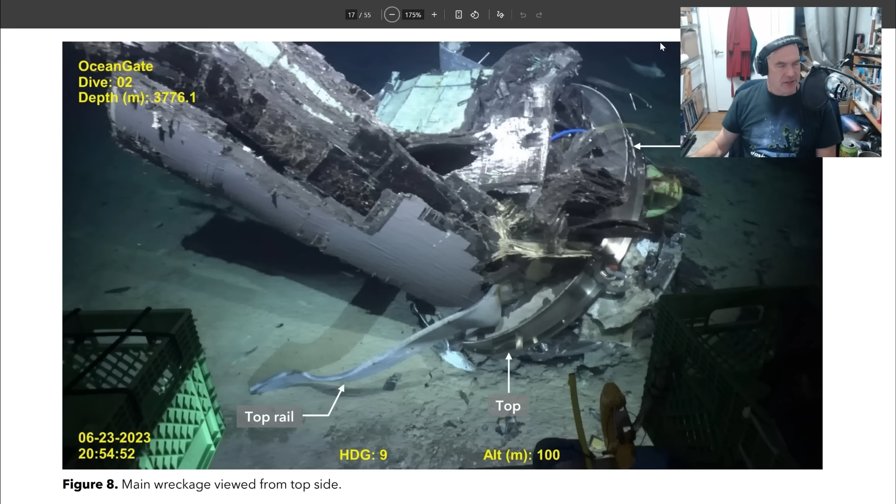So yeah, this is like the remains of the wreck. Well, first of all, the thing I want to talk about is the NTSB. They finally have released their report. So the National Transportation Safety Board, I read a lot of NTSB reports because they're usually the people involved in investigating plane crashes, right? Because it's transportation.

They're also involved in things like highway crashes, marine accidents, railroad, and under here there's also pipelines because, you know, if you've got a pipeline moving gas or oil between states and it fails, that's technically a transportation issue. So yeah, they've released their full docket with all the supporting documentation.

But before I look at this, I want to flick over to the Coast Guard site. Now, they also published their final investigation, their Marine Board of Investigation report in August. But the one that I want to look at here, just for a moment of, well, honestly, to get a giggle. And I know people died, but this is pretty funny.

So they interviewed an expert in submersibles, right? Obviously they talked to a lot of people involved with the company. They talked to some other people outside the company who are experts in the field. This particular interview was redacted, right? So we have Lieutenant Commander Redacted talking to Mr. Redacted. And this is one of the worst jobs of redaction ever.

So, interview of Redacted by Lieutenant Commander Redacted. So, how did you get yourself started into submersible operations? Well, I'm sure you're familiar with my film Titanic. Oh, gee, I wonder who that could be. Like, we got this far before the redaction became clearly irrelevant. This is actually a really fascinating document.

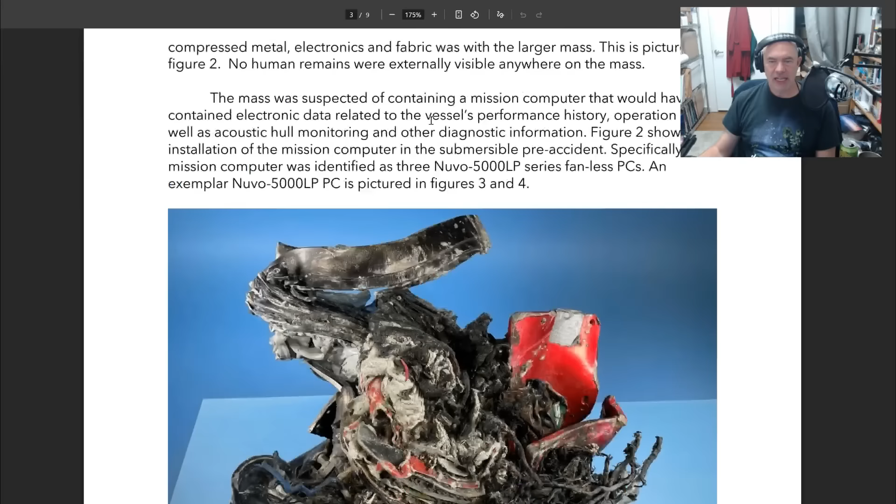What happens to the server room that is in the back of the submersible, inside that titanium hemisphere? What does it look like after being crushed? That's what it looks like. That is just mind-blowing. So yeah, the computers were all in this hemisphere at the back.

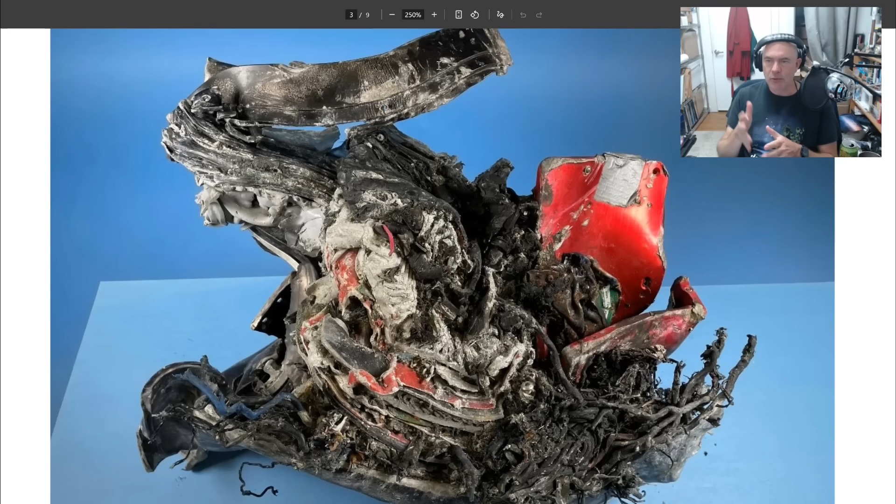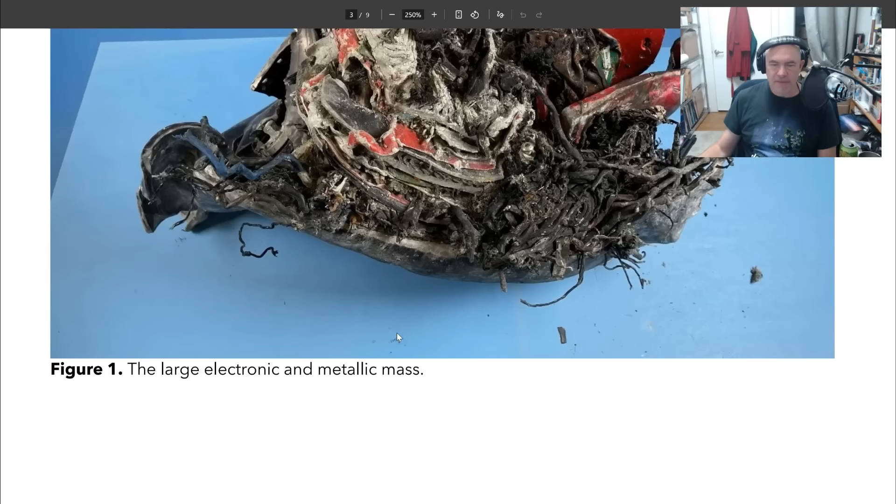There were 3 little PCs, there was a switch, there were radios, there were some cabinets, supporting structure, some other miscellaneous pieces of hardware. And there you can see a lot of the cables coming out here that were plugged into the switch. You can see over this side sections of the cooling fins from the PCs that have been squished down.

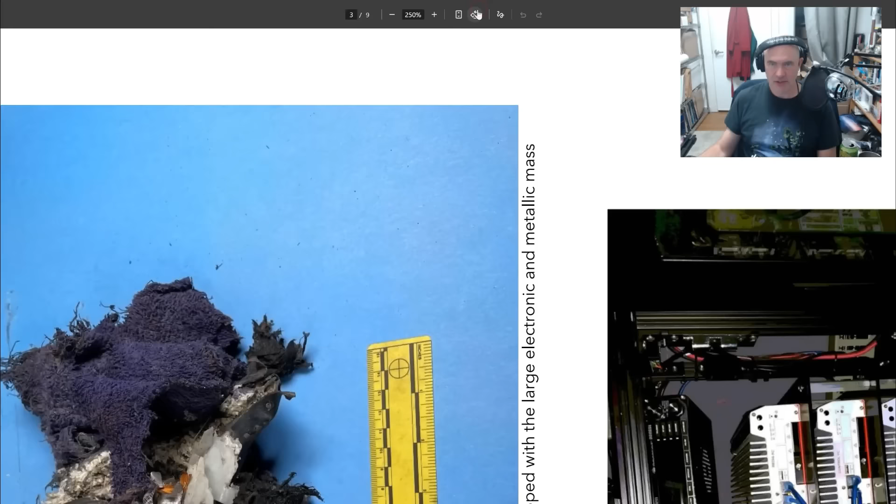Now, they actually have a photo later in this document of what the server room looked like beforehand, and you can see the switch down here, these 3 PCs, radio, there's a red metal structure. So I think this photo relative to that is actually upside down. So if we flip this one over, we can get a better idea of how this compares. So these are Nuvo 5000 LP fanless PCs that were in the back there. And they had 3 of them for redundancy to run their data logging and everything else.

What's also fascinating to see here is the amount of charring and heat damage. Now, we've previously mentioned that when you take a few cubic meters of air and squish it down by a factor of 400, 400 atmospheres of pressure, then it's going to heat up like the air inside a diesel cylinder inside an engine. Well, that's going to heat it up to some pretty high temperatures. Now, I was skeptical of just how much heat damage we would see, because there's only a few kilograms of air, really only a kilogram or so of oxygen, so it can't really burn everything, but it can char the surface. And that's what we're actually seeing here, some of this material appears to have been charred.

Now, I thought that some of this might be due to lithium-ion batteries that were in there, but as far as I can tell from the operation docs, they used lead-acid batteries inside the submersible. The lithium polymer batteries were outside, and so those wouldn't go up like this. There might be some other sources that could cause this kind of damage, but you can look in here. First of all, yes, we've had one of the most violent events that has ever been experienced by a computer, and yet the duct tape still remains attached.

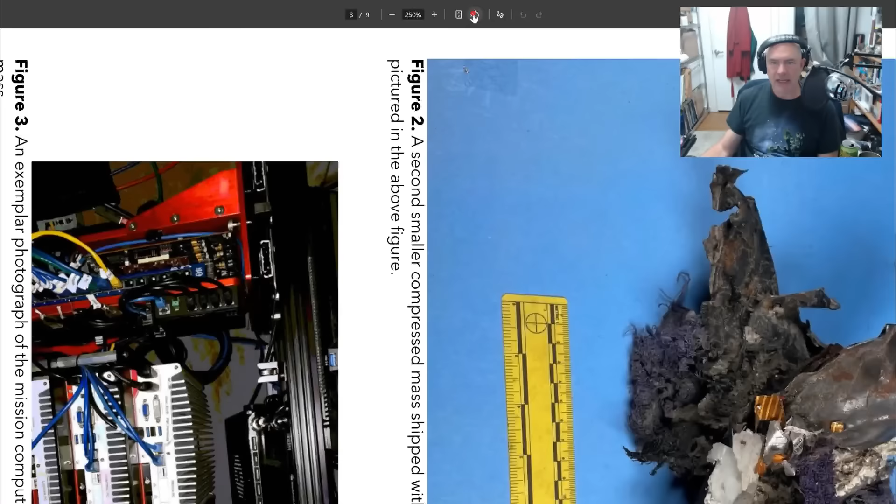So if we come back out and I flip this thing back around, we'll talk about a few things here. So yeah, they received 100 pounds of compacted, smashed, compressed metal, plastic, electronic components and other materials. It exhibited signs of thermal damage without typical signatures of having been exposed to open flame. Right? It was exposed perhaps to the heat of flames, but only for a fraction of a second. A section of the mass contains a polar fleece material. Okay, wait. Stockton was famously seen wearing his fleeces all the time. They didn't see any human remains externally visible anywhere on the mass.

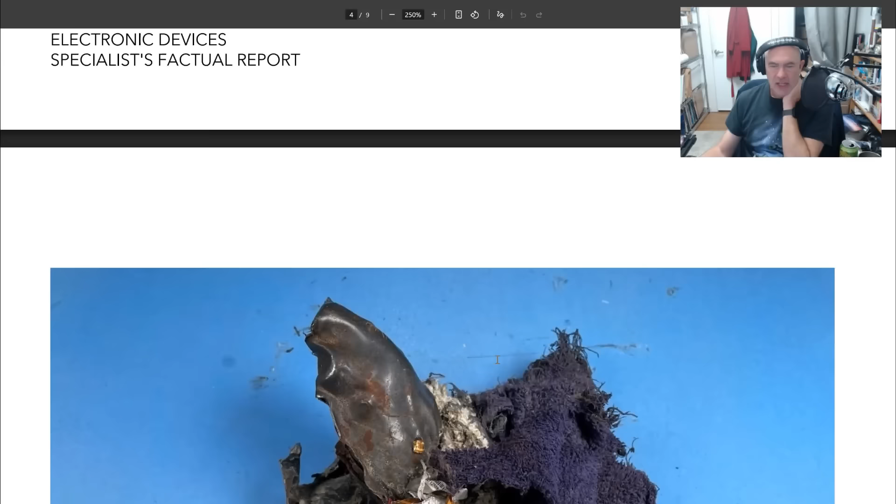Okay. The mass was suspected of containing a mission computer which would have contained electronic data related to the vessel's performance history, operation, as well as acoustic, hull monitoring and other diagnostic information. Figure 2 shows the installation of the mission computer. Okay, so this is the thing, and we've already shown the standard installation. And then this is the other piece that they got out, and here you can definitely see that fleece material. It's sort of the right color, but having said that, I wonder if they wouldn't have blankets in there in the back. It would kind of make sense to bring blankets as extra supplies, just in case they get stuck down there, as they did when they had problems operating it.

I wouldn't be too focused on the morbid nature of these particular fleece fragments, but could be. I mean, we know they recovered his pens and business cards and stuff from sections of his outfit. So yeah, looking back at this.

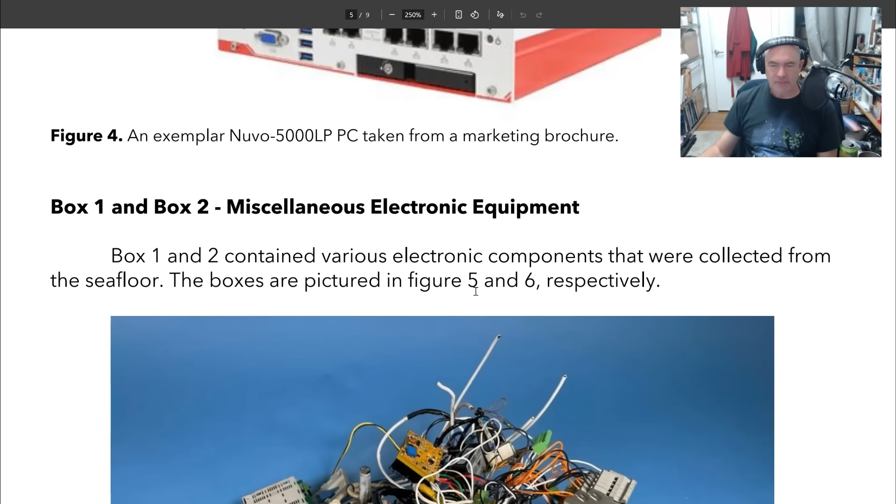So anyway, the team at the NTSB were really interested to recover any data from this that was possible. They also found some other boxes, and were given other boxes of electronics which were easily identifiable.

This looks pretty pristine, and you might wonder, how did that survive this incredibly violent implosion? Given that this has a circular metal plate here, I think this is probably one of the glass spheres which were in the fairing at the back. These contained a lot of the electronics for operating the motors and stuff that had to be outside the hull, and they were in these glass spheres which were rated to the depth.

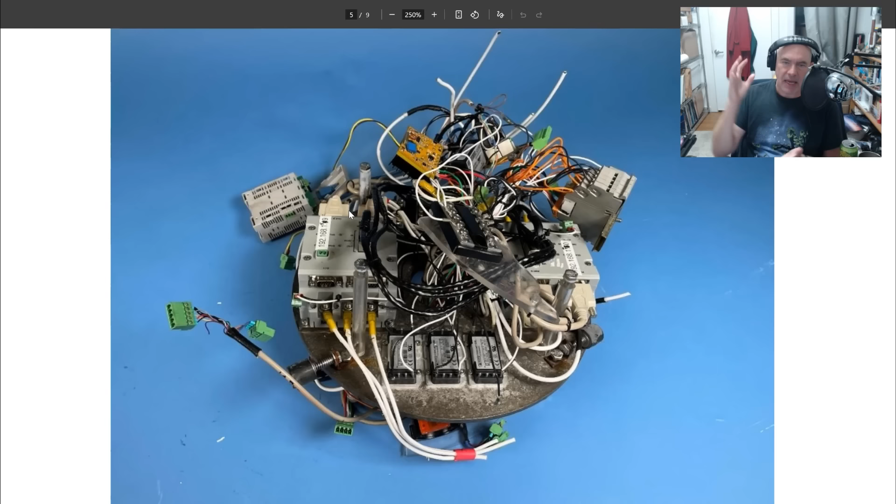Because if a glass sphere were to fail or collapse, it would release a bunch of energy, equivalent to like half a kilogram or pound of TNT. So what you do is replace the air with something incompressible - they fill these with mineral oil. So while these were smashed by the implosion of the primary pressure vessel, with pretty violent forces involved, these things weren't subjected to massive changes in pressure. Therefore, they survived in pretty good condition.

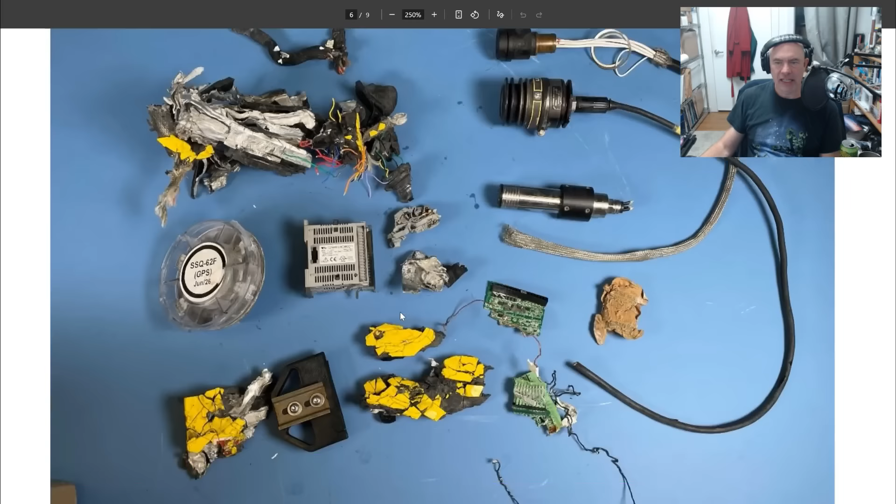The other box had a bunch of fragments here and there. Some of them look crushed, some look like they could have come from a sphere. I can't really identify anything here, and as far as I can tell, none of these look like a video game controller.

So they want to try and recover the data - this is what NTSB does. This kind of forensics is key to so many aviation investigations. They triaged the material at the Vehicle Recorder Laboratory. It consisted of layers of compressed material. The layers could not be removed or exposed without using significant force and mechanized tools. As such, there was a concern that examination in this manner could damage any memory components.

So they wanted to see if memory components were survivable, and wanted to evaluate it. They took a computed tomography scan of the mass, which basically fires X-rays through it, and as you rotate it, you can reconstruct the 3D model.

I made a video on X-ray tomography a few months ago at Lumafield in San Francisco. I went and X-rayed an old piece of Soyuz hardware, and then used their super fine detailed tomography scanner to detail the internal structure of heat shield tiles from spacecraft. That is a fascinating video. Many of you did not watch it. I would suggest you go back and watch it because it's fascinating to see the microstructure of heat shield tiles revealed in X-rays.

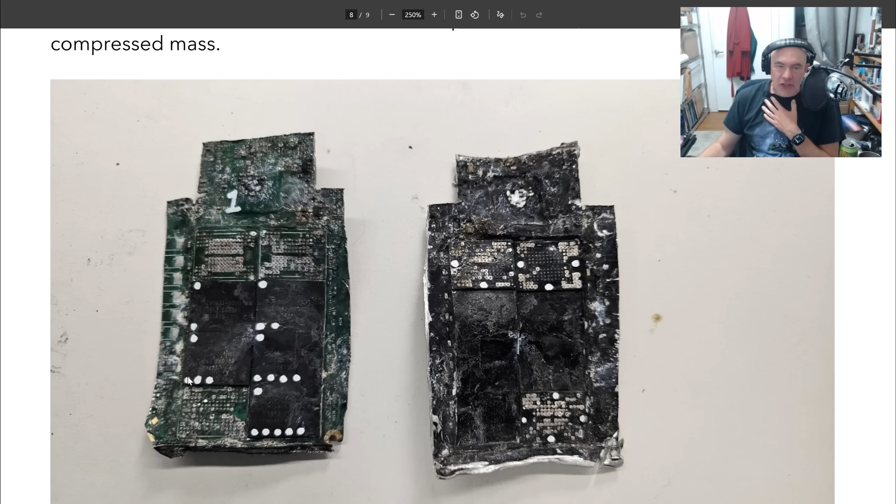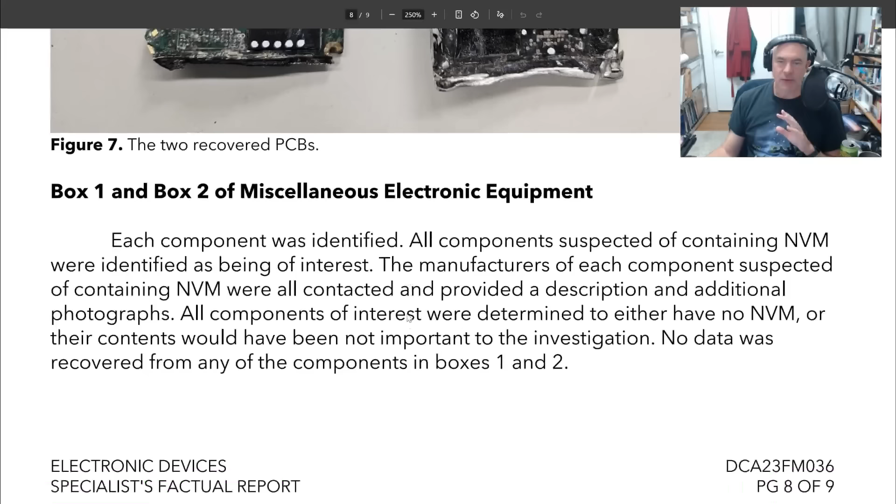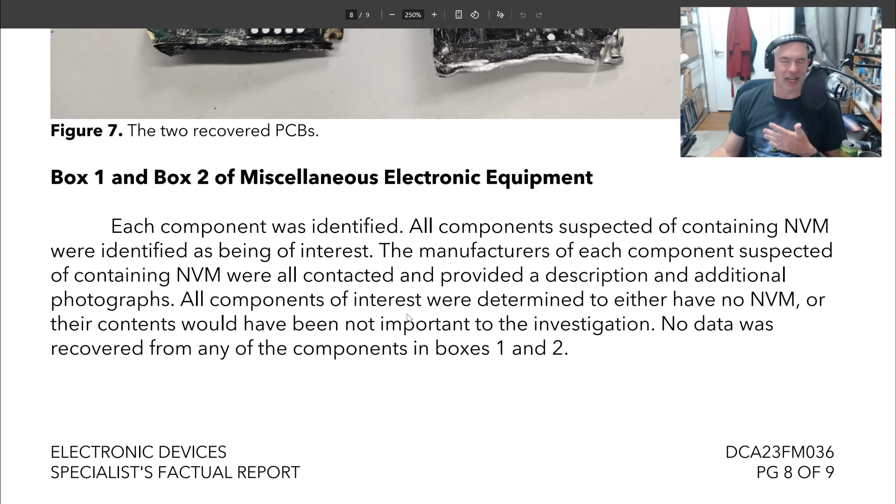So yeah, they basically recovered no data from this, but I found that process absolutely fascinating. Now, they did look at the stuff from the other boxes, and they basically said, as far as we can tell, the devices that are interesting don't contain non-volatile memory, or if they do, it's not going to have anything related to the real-time monitoring system. So yeah, that was that report. It was a dead end, but again, a part of the journey.

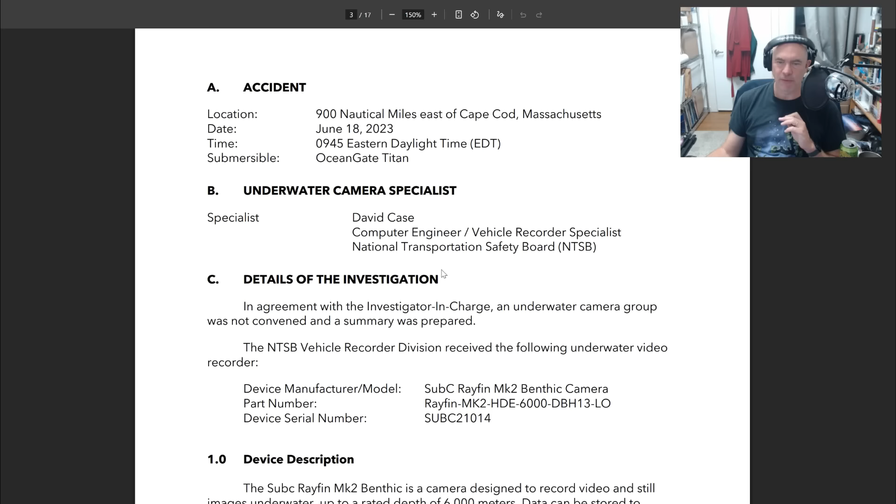You know what they say, the journey rather than the destination is sometimes the story. So the other one, again, very much journey rather than destination. This is the underwater camera. It was mounted on the outside of the hull. It was like a 4K, 12 megapixel camera used for imaging. It was a SubC Rayfin Mark II benthic camera, designed to record video and still images to a rated depth of 6,000 meters.

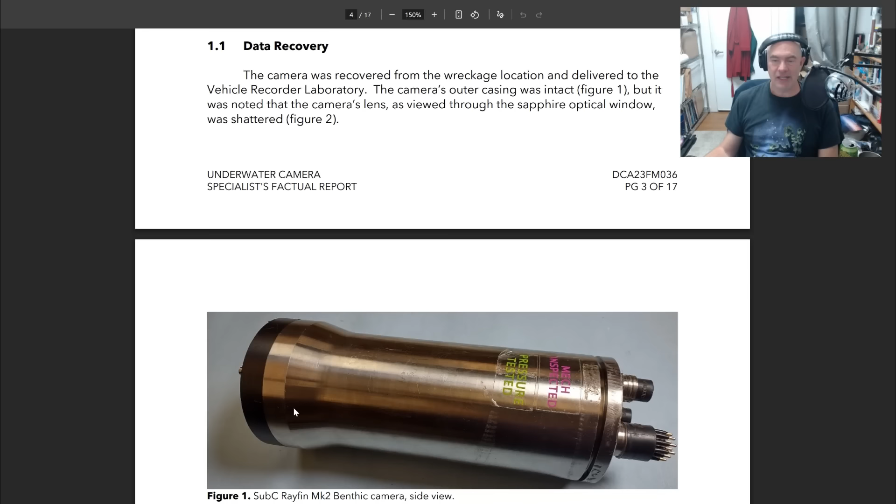So this was built like the submarine should have been. Data could be stored to the onboard memory or to an external computer. It's made of titanium, and the camera's front optical window is made of synthetic sapphire crystal. So yeah, they got this, and it was basically not imploded. This survived the violent event next to it.

If you think about it, as a submersible collapses, it's releasing a lot of energy, and that puts a shock wave into the water around it. There have been cases, or suspected cases, where remote vehicles have had a camera casing implode, and the shockwave from that has damaged other components. So while this could handle 6,000 meters, it wasn't a surefire thing that it was not imploded by the adjacent wreck. This thing survived, but it was exposed to those kind of shockwaves.

You can see gouges and damage on the surface. They basically take the casing apart and find the interiors. The developer of the board, the hardware, Rayfin, or SubC Imaging, asked for redactions of various chips.

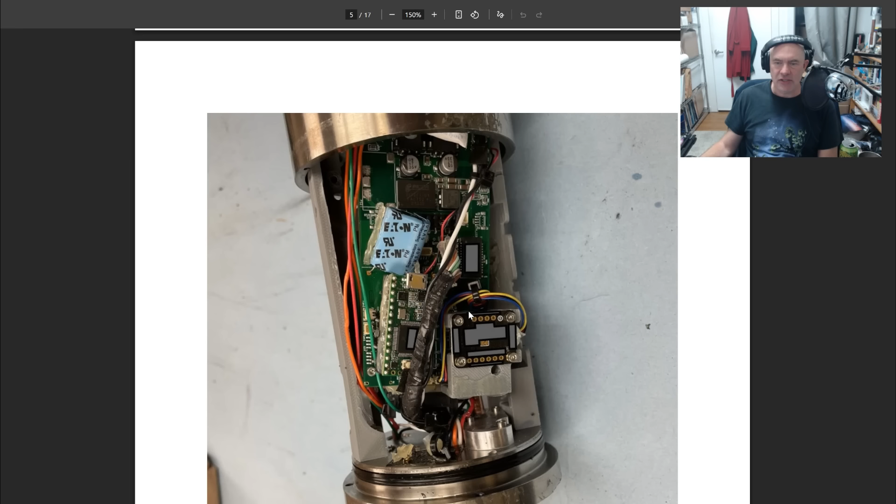What they did find was that while the interior was not compromised, there was no damage that had smashed through, they did, however, see mechanical damage. Components had literally sheared off. Think about it: the case is intact, the interior has not been directly exposed to anything, but the whole camera case has been shaken with such violent force that the circuit board plugged into it sheared off. Just think about the force that takes. It must have had thousands of G's of acceleration as the interior collapsed. That gives you an idea of how quickly this thing moved and how quickly it stopped after the event.

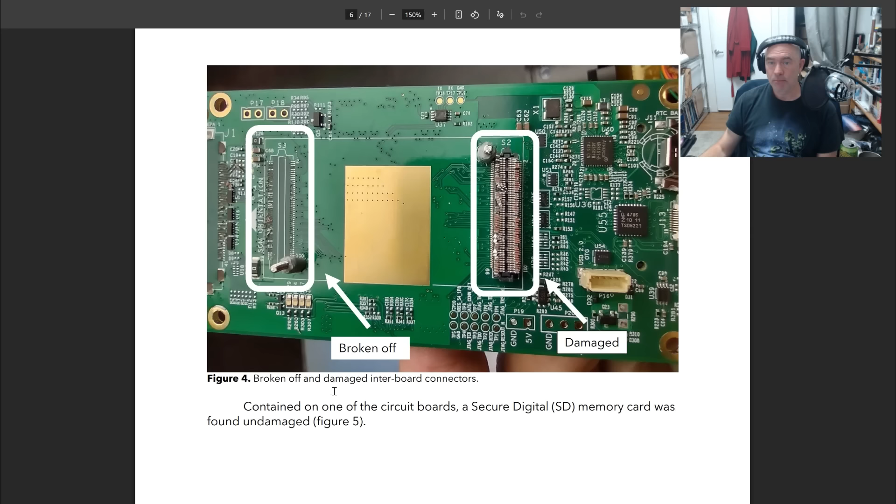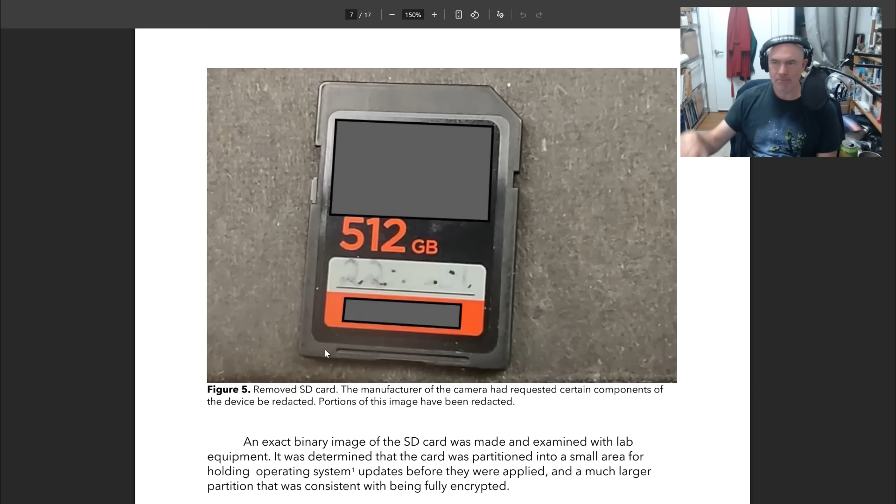So anyway, one of the circuit boards has a secure digital memory card, and it was found undamaged. Again, it's redacted, but that is the SanDisk Extreme Pro something or other memory card. I don't know why they decided to redact that, but they did. So they took an exact binary image of the SD card. This is an important thing: when you're working with digital data, where possible, you take a copy and work off the copy. You try to avoid using the original unless it's absolutely necessary.

So it was determined that the memory card was partitioned into a small area for holding operating system updates before they were applied, and a much larger partition consistent with being fully encrypted. Further examination revealed that the operating system version in the update partition was from 2016 and would typically have used file-based encryption for its user data partition. The larger data partition was encrypted with full disk encryption, an older method used by various operating systems.

So basically this is running something based on Linux, but they couldn't find the crypto keys on the card which would enable them to decrypt it. SubC Imaging, the manufacturer of the camera, initially confirmed that the camera data was stored on the SD card and they could download the data from the accident card at their office in Canada.

They later got back and said actually no, we can't do this. So what they were saying is, sure, send us the SD card and we can just plug it into one of our development boards and read it. But once they looked at it, they realized the encryption keys are specific to each device, so they couldn't find the encryption key on the SD card, and it didn't contain a boot partition for the camera. The camera hardware runs a little Linux system, and it wasn't booting off the card, it was booting off something else.

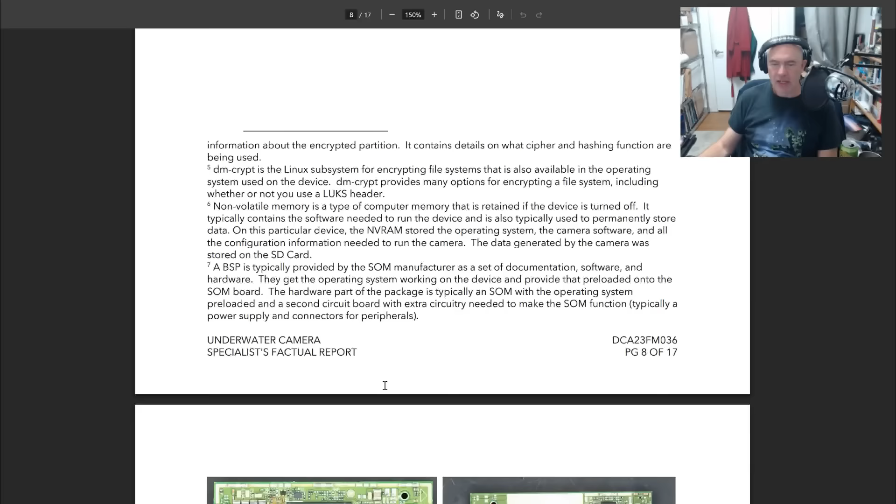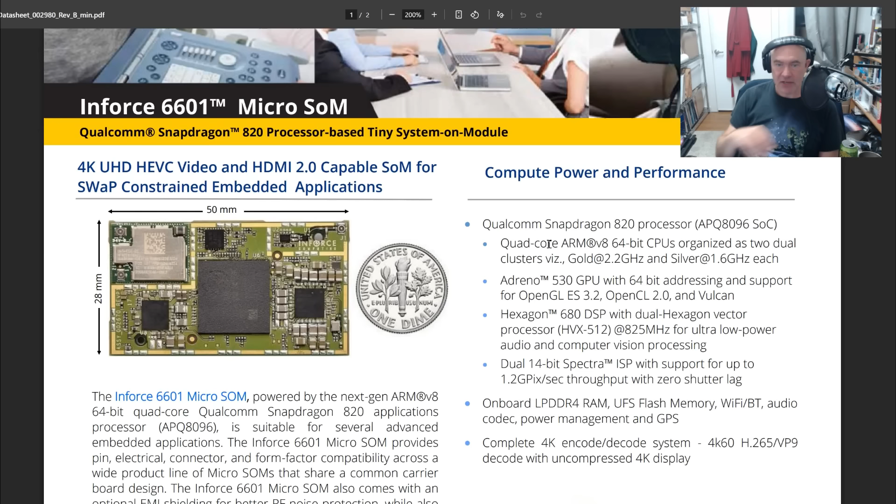So they found the main system was a system on module board, basically an all-in-one computer like a Raspberry Pi. It has a CPU, memory, some non-volatile storage, and ways of connecting to other peripherals. It's all redacted, but I looked this up - it's an Inforce 6601 micro SOM, running a Qualcomm Snapdragon 820. It's designed for video encoding, HDMI, all this other stuff, which makes sense, and it comes with 4 gigabytes of LP DDR4 memory and 64 gigabytes of UFS flash storage.

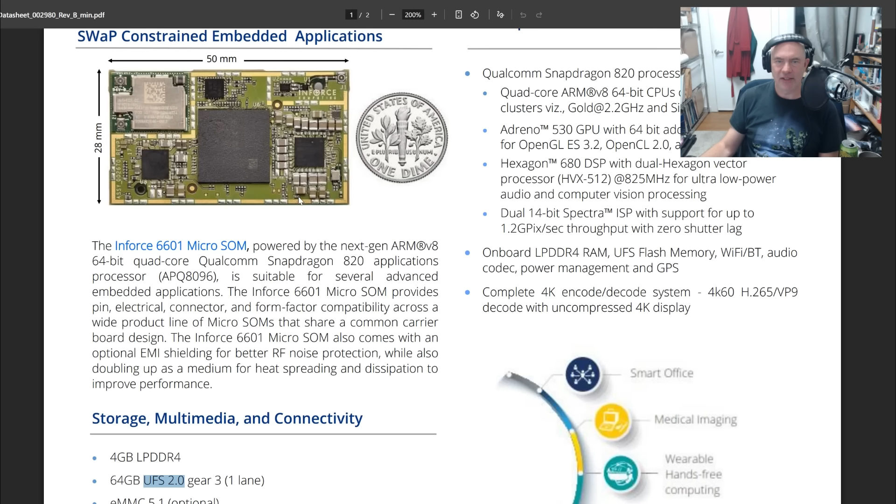So that would be - well, these are power chips. I'm guessing that must be the flash, because these are definitely power, with all these resistors around the outside. Those are capacitors and others - yeah, these are for power conditioning. That might be your memory. I don't know, I'm not an expert on this, I should just shut up.

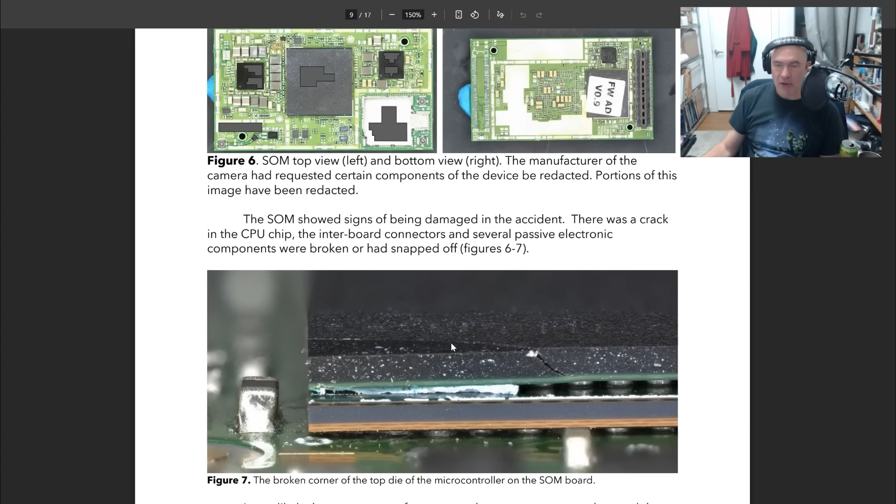So they pulled this out of the camera and found that the system on module was damaged, so it probably would not run. It was likely the camera manufacturer may have never attempted to read the SD card directly, since that would require disassembling the camera, which would add wear on the water protection seal. Therefore the SD card would always have been accessed by a device connected to the back - this is probably why the manufacturer thought they could read it and then realized they couldn't. Depending on how the system on module was configured, it could have stored encryption keys in the NVRAM or the trust zone system, meaning the key would effectively be stored on the CPU.

If the CPU was damaged, keys in the trust zone would probably be lost.

So the board manufacturer was contacted, and they provided a sample operating system install with the boards that they shipped, confirming they did not knowingly set up encryption. They also confirmed the keys stored would either be in the NVRAM or the trust zone. So they have two options to get this. If the data is in the NVRAM, one way is you take the NVRAM off, back it up using a flash reader, and then use software to attack it - basically try to build a version of the system on module that talks to this RAM and run through all the stuff.

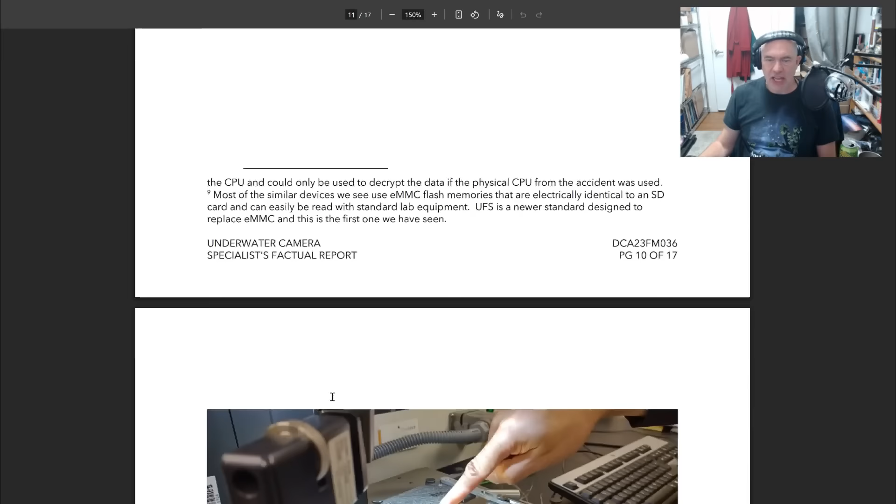So the first thing was to get the NVRAMs off the chip - they have a photo of this to get an idea of how small this is. They're basically taking the NVRAM chips off, a universal flash storage device. They found a chip reader that would work with it, read the chip with a UFS reader, and looked at the contents of the NVRAM. They found it wasn't encrypted, but couldn't figure out where the key was for the SD card. It was likely hidden in files, and they needed software to read that, and the manufacturer was reticent to give them the software to do it.

I think partly this is because this manufacturer used to be Inforce, but by the time this accident had happened, there had been some mergers and acquisitions, and it was essentially a different company selling different products. This was an old product, it wasn't really supported anymore.

So yes, they got a good copy of the NVRAM data, and they decided to focus on the hardware route. They talked to the camera manufacturer, and they said that they could get a board from them. They could put the chip on that, but they couldn't provide the ancillary equipment. So the deal was made that they would get the boards, these system on modules. They would put the NVRAM chips on there.

They would actually use one that was the original, and then they would have a copy of that made from their flash reader. They would put that one on a board, and they shipped those up to Canada. Or actually, I think they traveled up to Canada with them, and also with copies of the SD card. They went to SubC Imaging's office, and they sort of plugged it into SubC's dev kit, booted the system up, and they were, in fact, able to read the SD card contents.

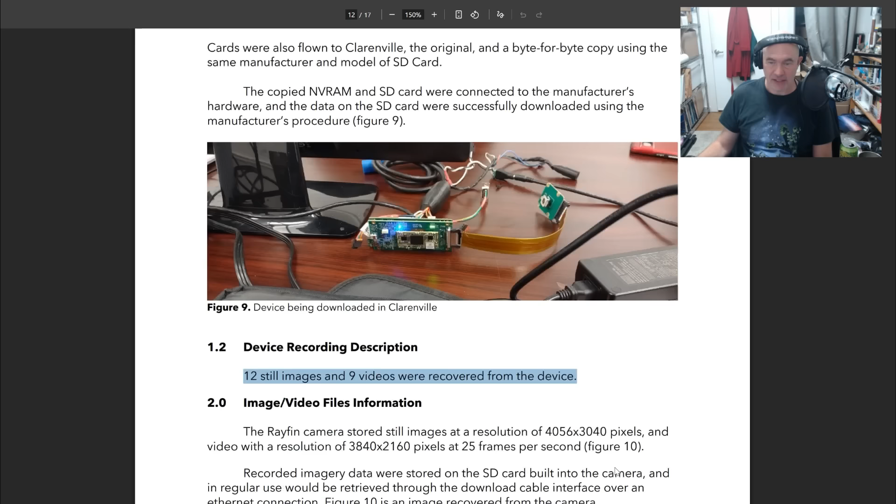This is their test setup here, running the flash chip. I think this is probably the copy, you know. Just imagine, maybe that has been recovered from the deep sea ocean. So what did they find? They found 12 still images and 9 videos which were recovered from this device. So that was a breakthrough. That was exciting. Now, the next thing is that they actually looked at them, and that gives you an idea of where the camera was located looking forwards. Gives you another idea of where it is.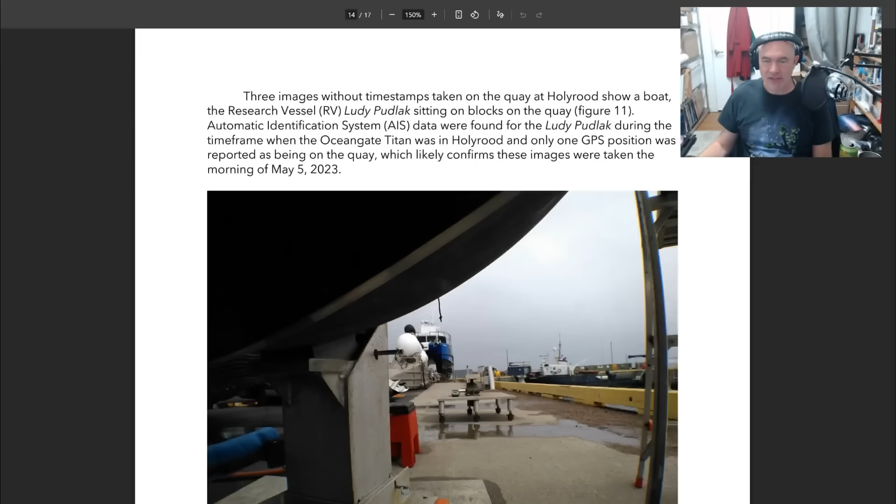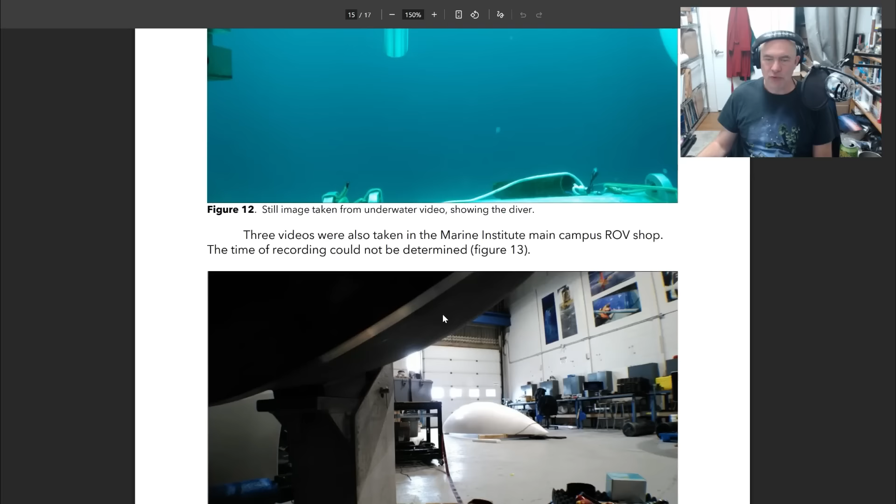Now, based on this image, they were able to date it to May of 2023 that showed that it was operating on a dock. They then found another image which they couldn't really date, and a bunch of other images that they couldn't date, and one that was in a place where it shouldn't be because somebody had misconfigured it. But basically they figured out that none of the images or video on the card were from Dive 88 where the accident happened.

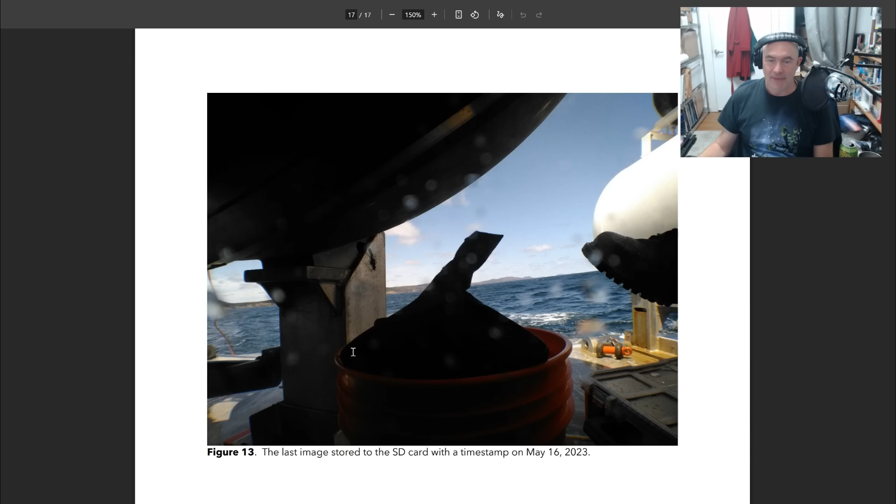So this probably meant that the camera was operating in a mode where it was taking the data, dumping it off through the cable to those PCs inside the hull, and that's where the imaging data was stored. And so they basically concluded that there was no data there available. But yes, this image here was from May 16th, 2023. So again, boy, this was definitely a case of the journey is more interesting than the result. But I thought it was absolutely fascinating to see the state of that hardware and the steps that the NTSB went through to recover this.

And so that brings us back to the NTSB report. Now, there's actually not a lot of new stuff in this. A lot of the conclusions are things that we could have previously reached, but I kind of want to just go over their sequence of events here. So the NTSB report does look at everything. They look at how was it managed. They look at whether it could have survived, whether they could have made different decisions for the search and rescue, right? But I'm really going to focus on the scientific material analysis because that's sort of my jam.

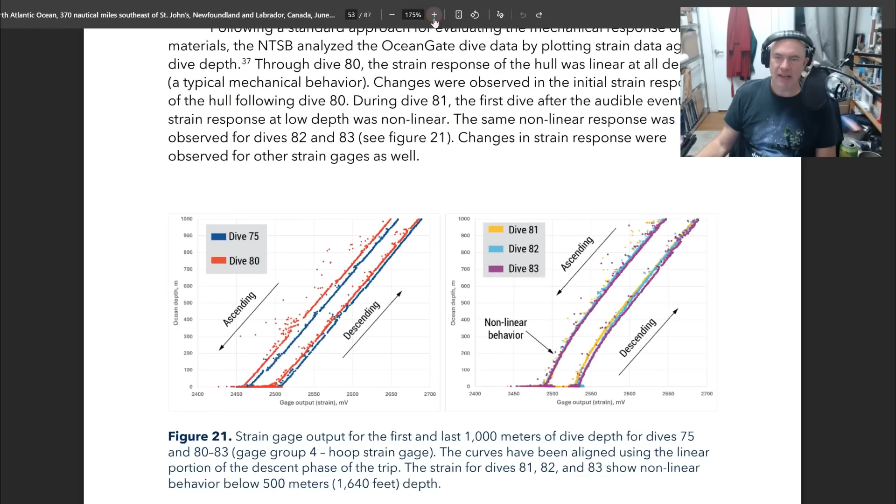Anyway, as we said, Stockton said, no, it's nothing to be worried about, and they continued diving. And that means we have strain data before and after this event. So this is the strain gauge. Again, it's showing as they descend, the ocean depth increases, the gauge output increases. So you feel more and more strain as they go down, and then the strain changes as they come back. And there is a hysteresis thing involved, which I don't quite understand, but I'm sure somebody will explain to me. So dive 75, very nice linear response.

Now, take a look at dives 81, 82, and 83, because they dove 3 more times after that big gunshot style sound that freaked out a lot of people. And now the thing starts as a curve before it reaches this sort of linear section. What's going on here? Well, if you think about it, these strain gauges are attached to the interior surface of the hull. And as they're descending, the strain is increasing more slowly until they get to a certain depth.

And how I would interpret that, and maybe this is wrong, is that if you've got the first layer now separated from the outer layers, those outer layers are essentially carrying more of the outside pressure until they get pushed in far enough that they start contacting the first layer again. Then they start to communicate the pressure. So I feel that this is just down to the outside layers not really communicating the pressure inwards as effectively as they once did. So something in the hull basically changed at this point.

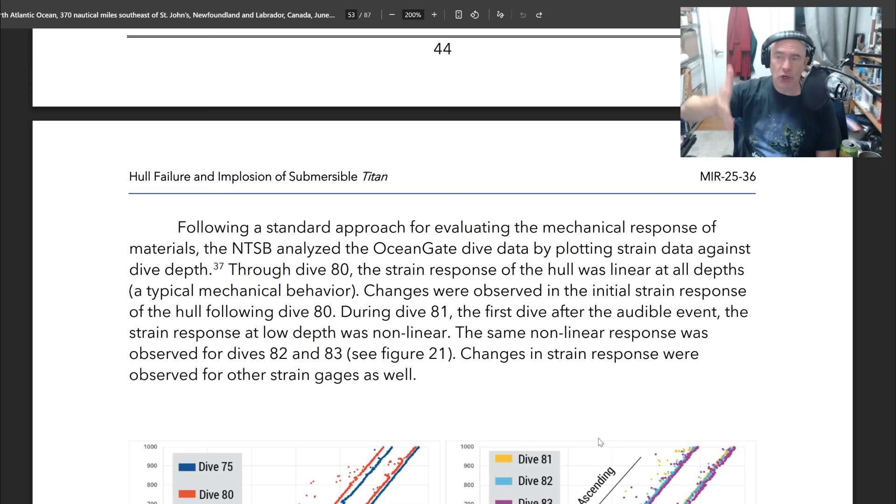So you have this system of events, the sequence of events where on dive 80 it gets damaged in some way which isn't investigated. They store it badly. You know, if you're storing it in water outside in the freezing temperatures, water can get into various points and it can expand. We've seen that in, well, the geology of the entire planet, right? Freezing water can break things. And that could definitely be a factor if it managed to get in.

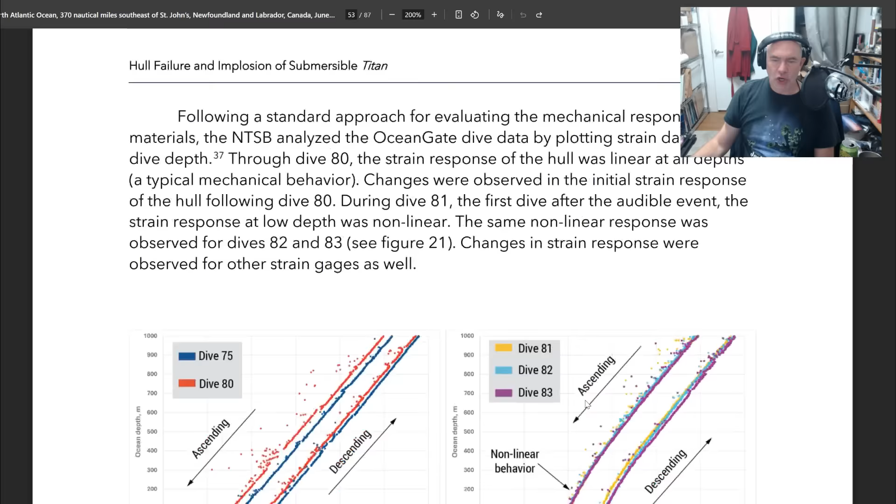And look, if you're at the bottom of the ocean, there's a lot of places where water can get in at those pressures. Or it could just be repeated damage from transportation and stuff, which really pushed it beyond its limits. Okay, so now knowing the story of the damage to the hull that led to the failure, can we get any more clues as to what the actual failure was? So a lot of this data comes from actual examination of the wreckage on the seafloor and the materials which were analysed in a lab.

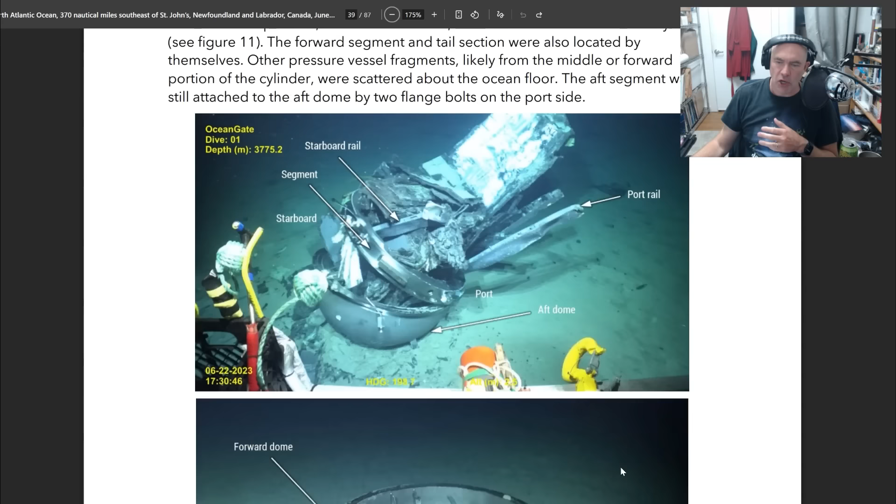And this was all published last year, but I'm going to go over it again because this is now the NTSB's official conclusion. So this is what they found on the ocean floor. The rear section still had most of the carbon fibre inside it because, of course, everything gets squeezed in quickly. The front section pops off because as the water comes in, it rebounds. Well, the rear didn't rebound like the front section because it has a fairing attached to the back of it with extra syntactic foam and batteries. So it couldn't get pushed away. That's why it remains with most of the material.

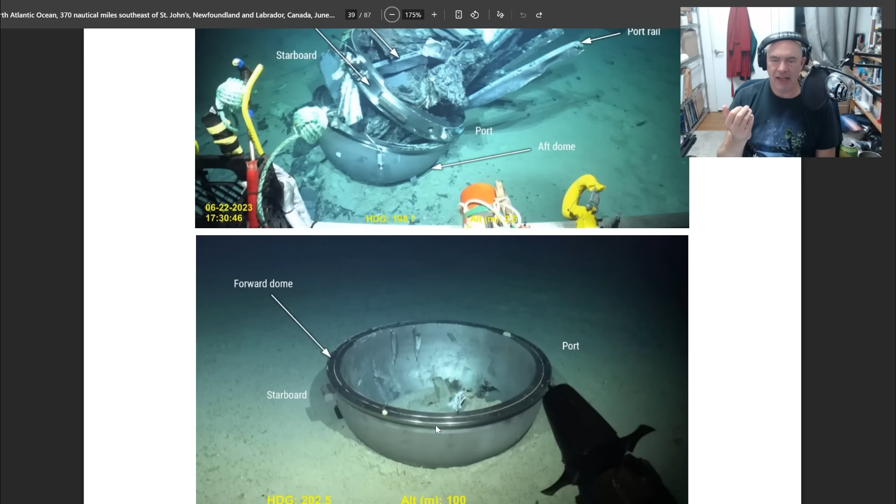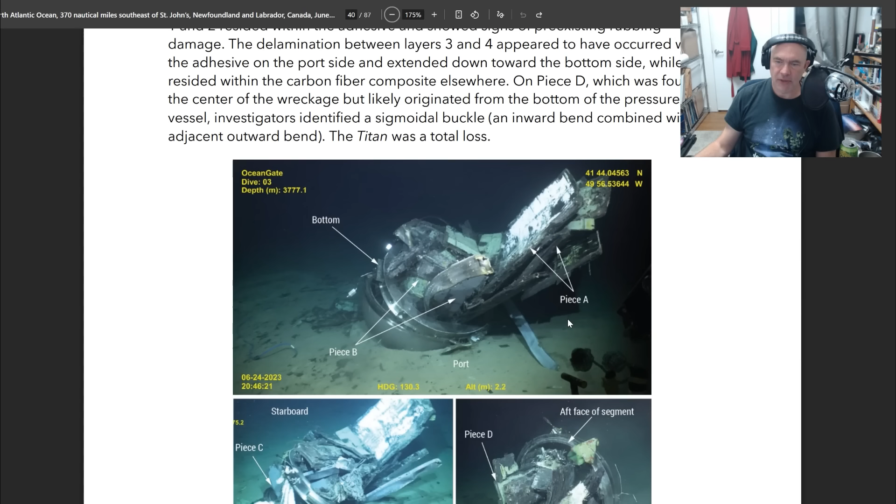The front section, of course, had the window in it. The window gets popped off. The window was not believed to be relevant to this. While it was a non-standard design, it doesn't mean that it was involved in any way beyond getting pushed out of its mounting, and it was never found. Anyway, so the ROV is analysing this. They identify various interesting pieces. They can see all the way around that there's these separations between layers 1 and 2 and 3 and 4. This is consistent across the entire circumference of the material that they found.

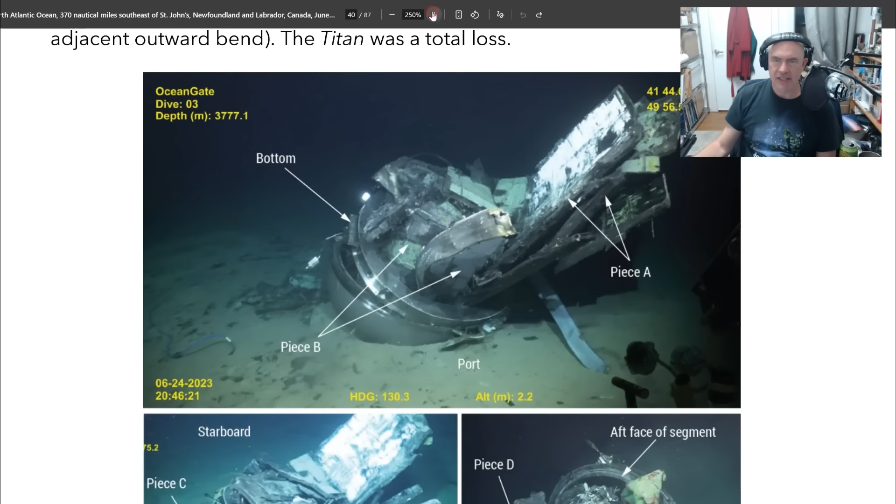Now, they then take a look here. What they've done is they've taken the ring and pulled it off and then looked at it from the other side. And there's a really important piece D here, which shows a buckle. A bend. So all the material is basically bending in one direction, right? This one bends in one direction and then the other direction. So this is an example of a buckle, and it's a buckle where I guess it's aligned with the longitudinal axis. It runs along the cylinder.

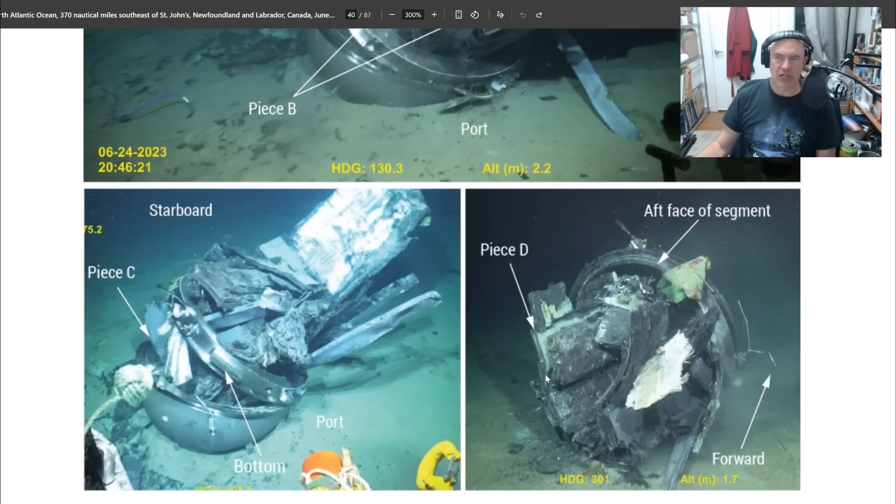So when you have a circular pressure vessel that's being squeezed, then it's like a bridge with no endpoints, right? There's no weak points, but if you find one weak point, then the whole thing will begin caving in. And a weak point could be where a buckle starts, and that changes geometry and then allows the rest of the stuff to collapse. So why would this buckle be aligned with the length of the thing? And this is where we come to those wrinkles which we've previously mentioned.

So this is an example of an end piece which was cut off the first Titan hull. That's the one that was taken out of service before anyone got killed. Now, this is the end piece there, and you see this wrinkle that had developed all the way through the section, and it gets thicker and thicker as it goes out. Now, an important thing to realise about carbon fibre is it's laid up in these flat layers, right? And the layers go in two different directions, but it's very strong within the layer. But moving across the layers, it's weaker.

So now, if you imagine that you have compression coming in from the left side and from the right side into this wrinkle, then as it hits there, the layers turning outwards will tend to transmit that compressive force from the side outwards, and it is weaker along this direction here. Also, because this is thicker, there's actually more resin in here and less carbon fibre. There's the same number of layers of carbon fibre, but the distance between them is greater in spots, and therefore it gets weaker.

And now, if you then add on top of that you've segmented your hull into 5 different segments held together by a dubious glue, then again, this buckling force that's pushing outwards is being transmitted through these glue layers, which have very different properties. So again, you've got to understand what a buckle is. If you take a look at my fingers, they're sort of pushing the pressure together, right?

As long as I keep my fingers straight, I can put a lot of force into there, right? But if I let them move sideways, the whole thing pops in, right? See, any disturbance off of center suddenly becomes a lateral force. And that's what these wrinkles are essentially doing here. They're allowing paths for this compressive force around the circumference to translate sideways. And since these ran up and down the pressure vessel, they would be natural points where the failure would happen.

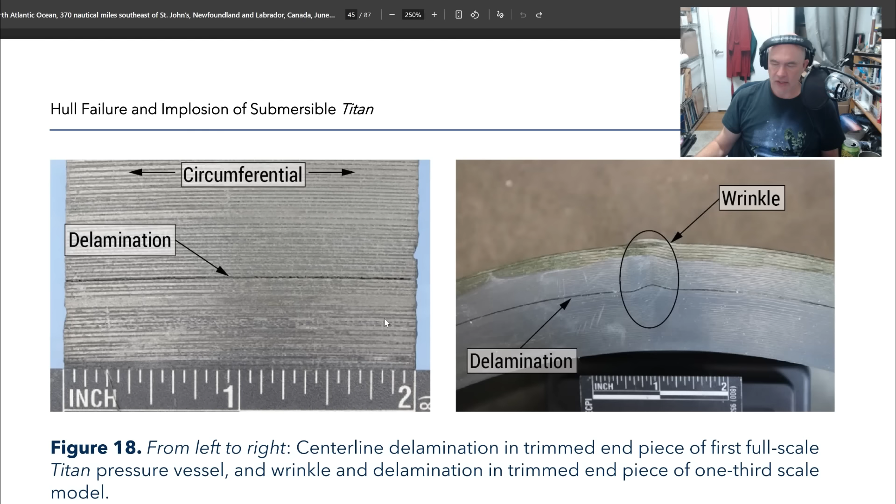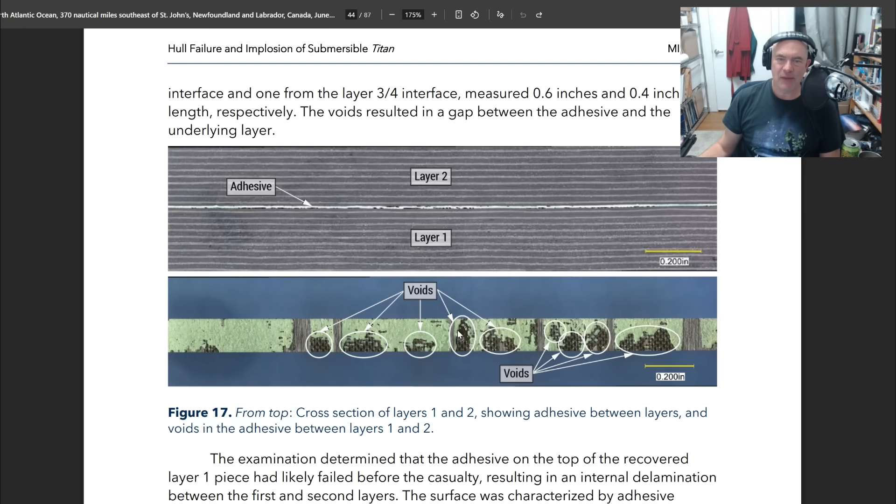Now, on the second pressure hull, as I said, they went and ground these things down because they saw that they would get worse and worse throughout the radius. That was their concern, but then they used these glued sections, and we saw in the analyzed sections that there were voids in the glue where it basically wasn't being held at all. We also found segments where the sections had visibly rubbed together along the longitudinal axis. There were voids elsewhere in the structure between the composite plies.

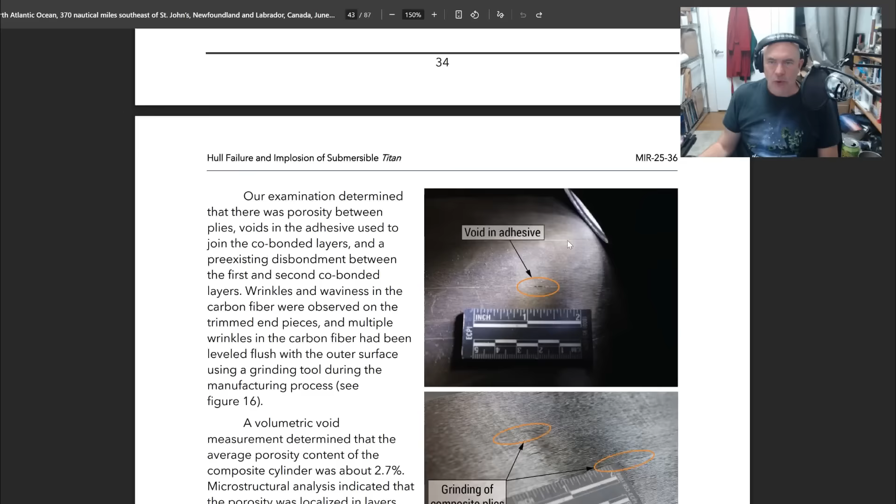So this material could have been made better, but honestly, when you start finding defects like this in the analysis, what do you do? You make it thicker, you add more layers, until you do get the safety margin you need. But that's not what happened. So anyway, that's sort of the state of play with this.

I don't think we're going to see any more major reports. There might be a few things that get released over the years, but I think by this point everyone has decided and understood that the engineering decisions made by OceanGate, and specifically driven by Mr. Rush, very much led to a submersible which was below the performance that was needed. And then the misuse of the real-time monitoring system data meant that they didn't see when it was going to fail. If they had had the right system, they could have seen the changes after dive 80 and they could have taken it out of service.

But they didn't do that. They didn't have it plotted in the correct way, and the guy at the top didn't want it to be taken out of service. And then that was compounded by the storage, the transport, and various other issues, which finally led to the failure.

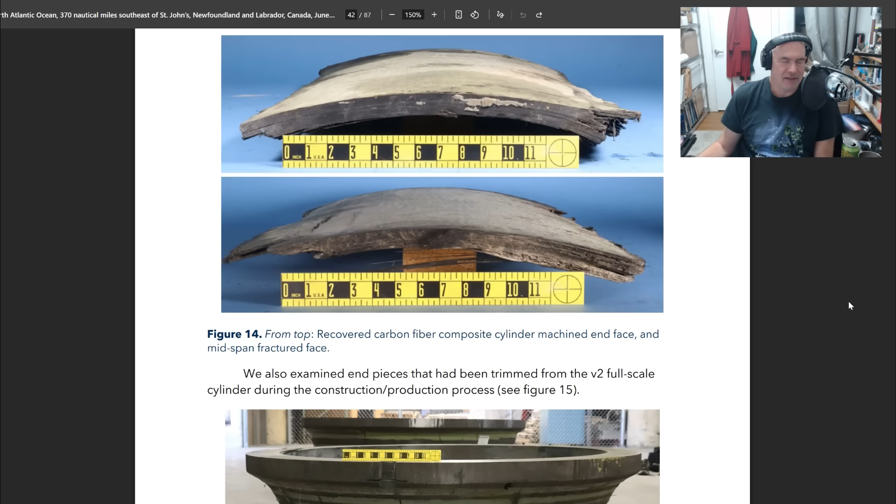As I said, I don't think there's going to be much more released, but there's a lot there to read, a lot of really interesting analysis, and I like reading these really technical things. If you want to read just one report, this is the 300-page Coast Guard report, which also incorporates a lot of the NTSB stuff. They have a lot more detail in here on specific things that happened at the government level and the various interactions with employees and ex-employees at OceanGate.

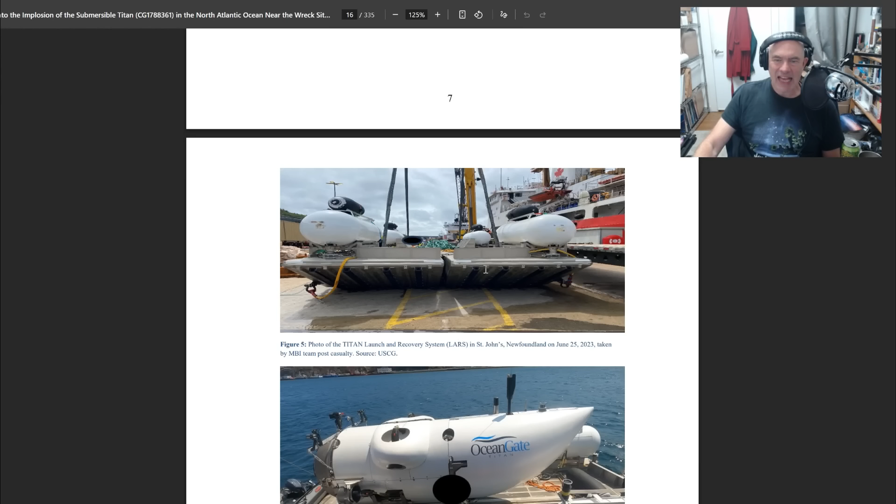But the other one that is worth reading just for fun is the NTSB investigation with Mr. Redacted, who apparently directed Titanic and some movie called The Abyss in 1989. This is full of all sorts of really interesting gems. Yeah, sure, he does make movies. He is a movie director, but like Elon Musk was a software guy until he became a rocket guy. It requires a lot of interest and dedication and work, and you can become an expert in the field. And I fully believe that James Cameron is very capable and worth listening to on this thing.

A lot of his real comments come down to: we've worked with Triton Submersibles. We know they're good. We know they have good safety margins, and we should make sure that whatever happens going forward, we're not penalizing people that are doing things properly.

One of the cool things I found in the James Cameron story is they talked about working with a metallurgist who pointed out that they used a material called 300M for the hatch, which had a microscopically different bulk modulus than the EN26 that they used for the rest of the sphere on the Deepsea Challenger. That meant the hatch would expand and contract at different rates under pressure. So there was a possibility that after they had taken this to depth, the hatch would reseat in a position which would make it impossible to remove. So they could be jammed inside there, right?